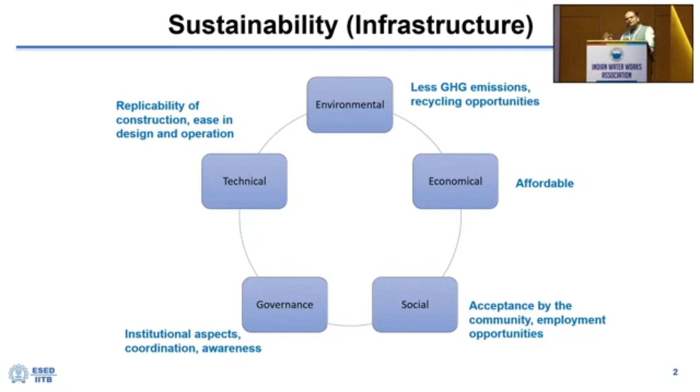Since morning we have been discussing reliable, resilient water supply systems and overall water infrastructure. First you have to understand what is sustainability. Sustainability can be defined by 5 parameters: something environmentally prudent, economically acceptable and affordable, socially acceptable, governance that is easy, and technically replicable by our own engineers and municipalities. These are the 5 parameters every technology or alternative should be evaluated on.

Now, in today's time we talk about resilience, another expectation from engineers to add to sustainability. We have been trying to achieve sustainability, now the era is of resilience. Resilience is a concept from nature - every one of us is resilient. We have shown resilience in COVID times, as a person, as a community, as a city. Similarly, infrastructure resilience is a new concept. Water resilience is the capacity of cities to function in the face of water-related stresses so that those living or working within the city can survive and thrive. Many such catastrophic events are happening, so resilience is very important.

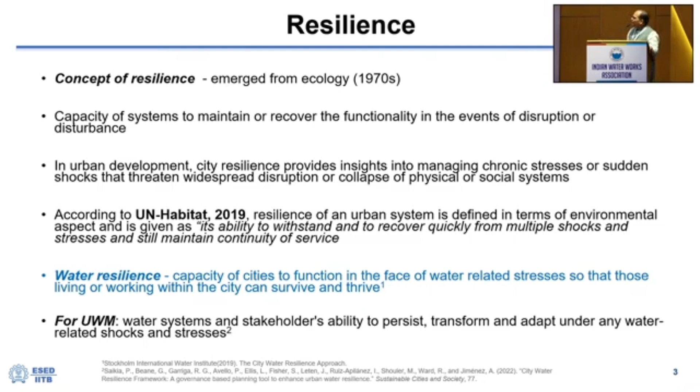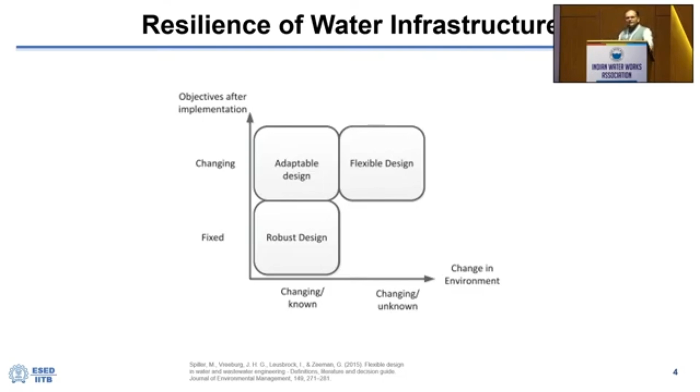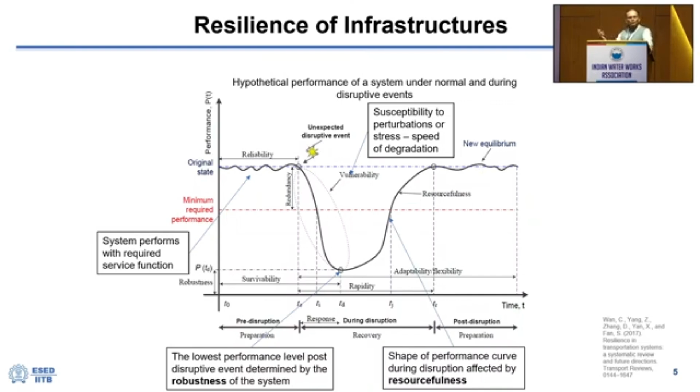Our designs have to be adaptable, flexible, and robust at the same time. All new planning and design guidelines have to consider these 3. On the x-axis you have a timeline, on the y-axis you have performance of infrastructure, measured by supply hours, LPCD, water access, and other parameters. Your reliability may come suddenly down due to flood or drought conditions. As soon as reliability goes down, how quickly you can bring it back up is the resilience, in the simplest term. A lot of knowledge needs to be created about how we can be resilient as a city or rural water infrastructure. So these 3 parameters help assess whether future water systems are adaptable, flexible, and robust.

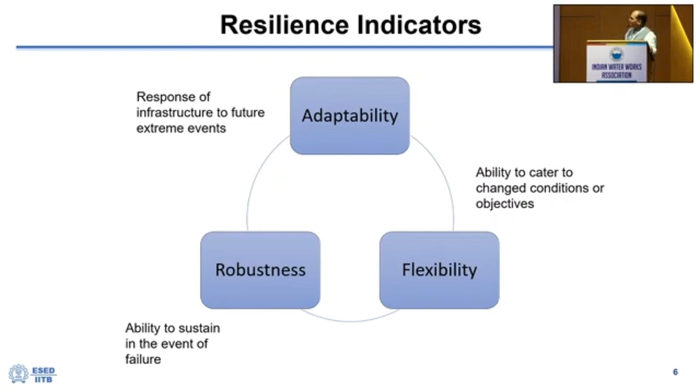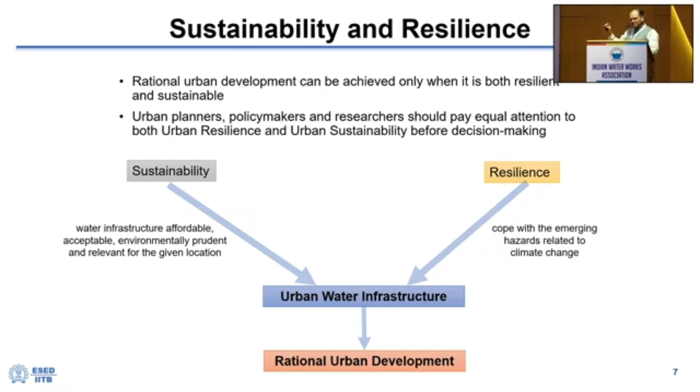So we have 5 sustainability parameters and 3 resiliency parameters to understand if we have to define futuristic water supply systems. Both perspectives are essential - whatever we are doing today has to be sustainable and also has to be resilient. Some of the discussions I'm going to make use these terminologies.

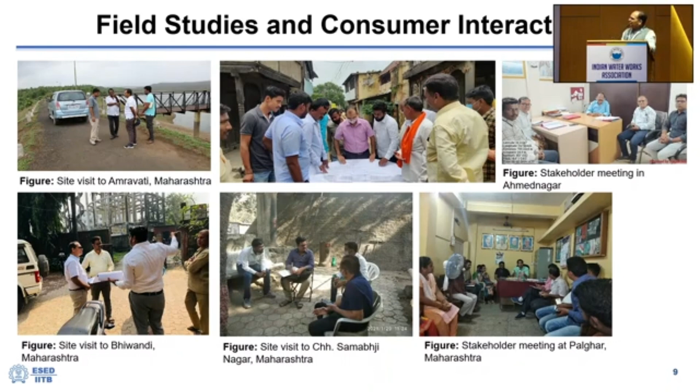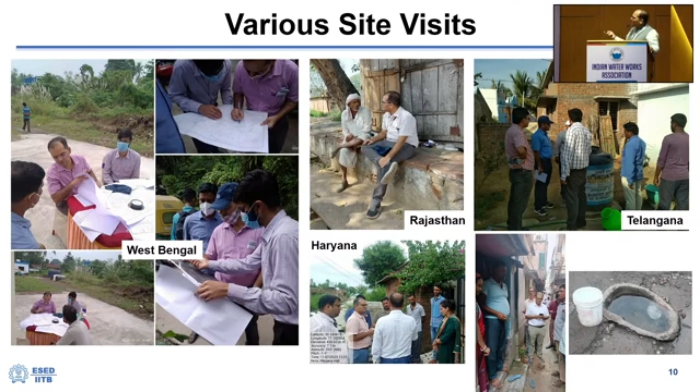Me and my research group study a lot of water supply systems across India. Whatever I'm going to say is based on this fieldwork, not theoretical. I've seen what happens on field in many states. We work with state governments, field surveys and measurements our team does. We understand what is happening on the ground. We do a lot of training programs, international studies, and workshops. We have studied 24/7 projects across Nagpur, Coimbatore - all these projects we have studied. So what I'm going to say is based on all these field observations.

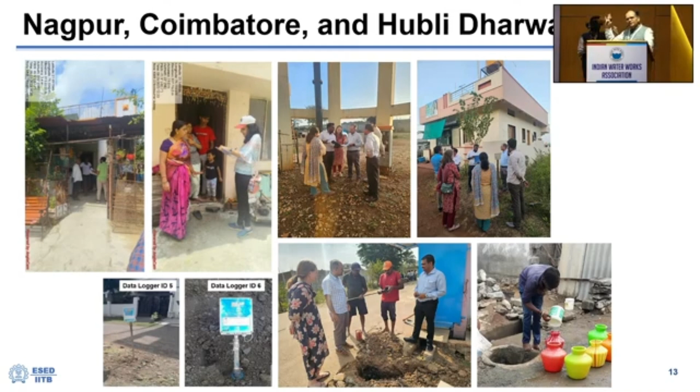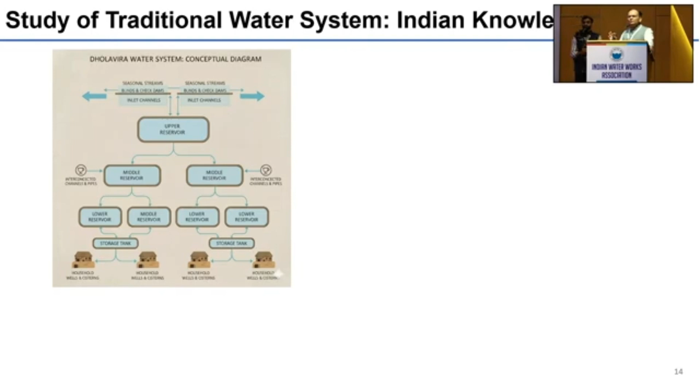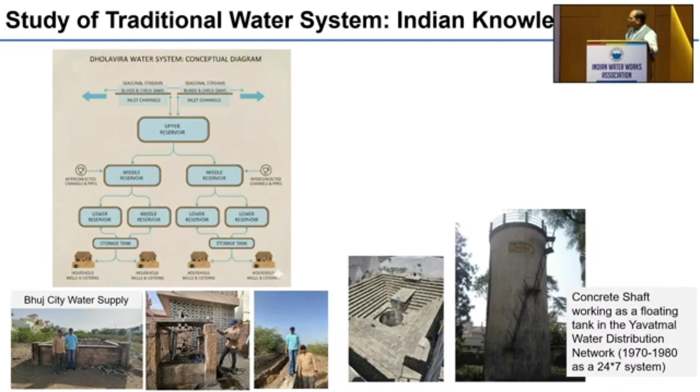A lot of traditional knowledge exists in our country which is basically getting forgotten. Our traditional water supply systems have been resilient. We are a country with tremendous traditional and cultural heritage which we are forgetting - rainwater harvesting structures, very innovative shaft kind of structures done in the 1970s by our own Maharashtra Jeevan Pradhikaran engineers. Many innovative structures exist which are not studied, not brought into today's time. All the knowledge has to be contextual to our conditions. This is knowledge we are missing from our own engineers and people - I think we should focus on that.

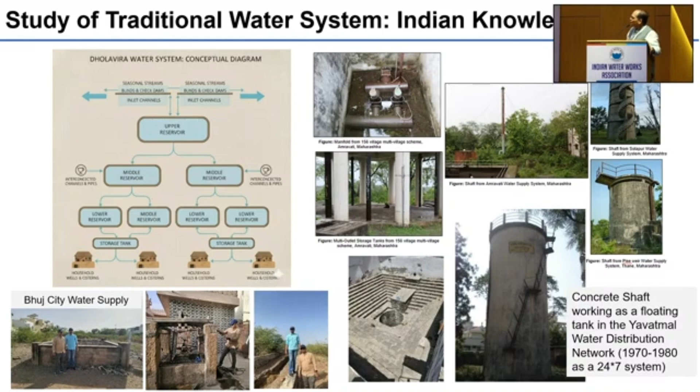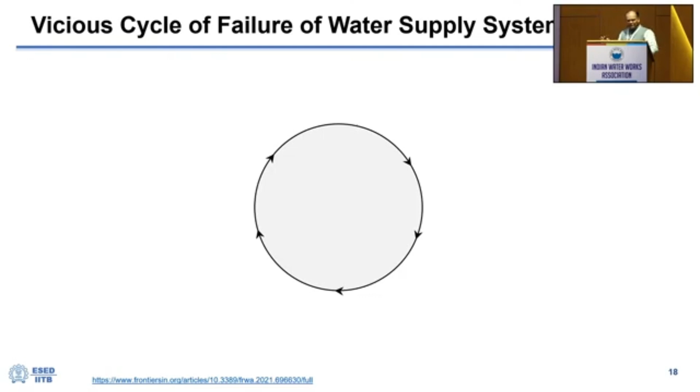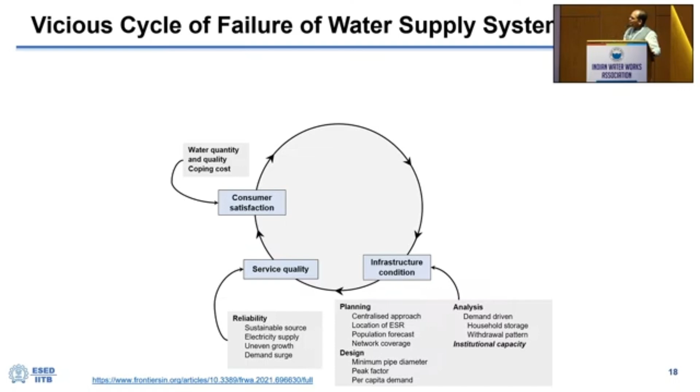So what are the challenges in the water sector? We are stuck in a vicious cycle. Since morning we are discussing what is happening. Infrastructure condition is poor because planning guidelines are not suitable, analysis is not happening as per our local conditions, design is not happening as per our local conditions. That leads to poor service quality, poor consumer satisfaction, poor revenue generation, and poor operation and maintenance.

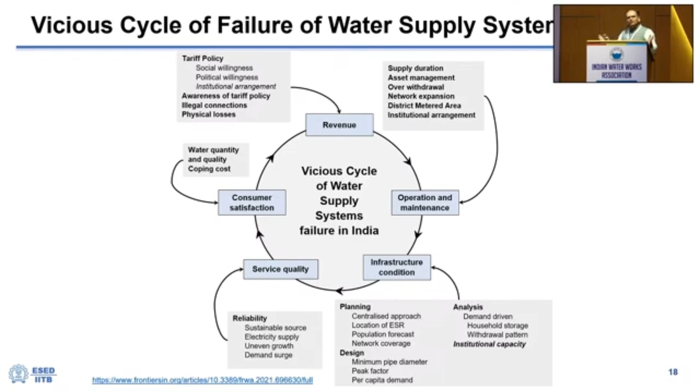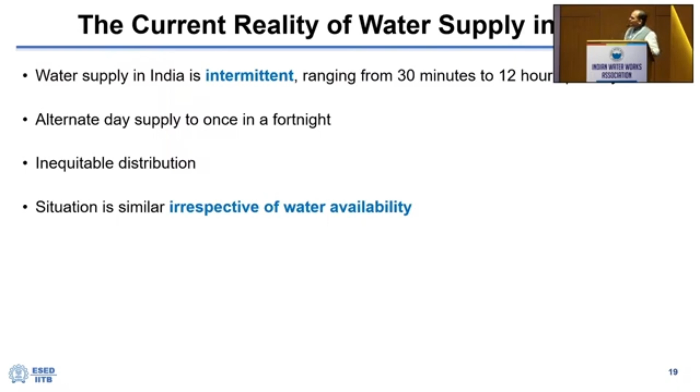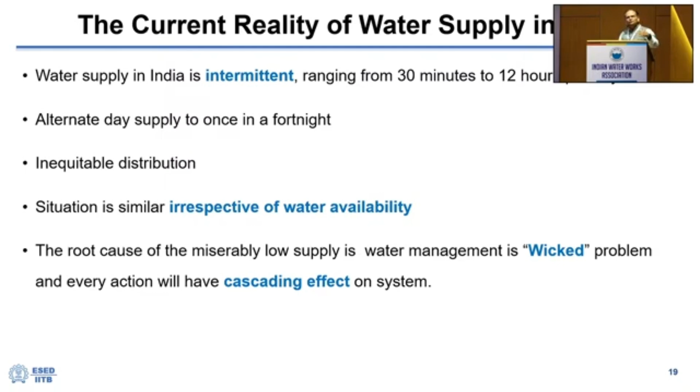Unless we solve this vicious cycle - studied by our PhD student Dr. Anuj Ghorpade, whose PhD dealt with how to break this vicious cycle - our water supply systems will not be futuristic. The current reality is intermittent supply, alternate days in some cities, some once in 7 days, inequitable distribution. The situation is similar irrespective of water availability - whether there is water or no water, we have tremendous challenges. The root cause is that water management is a wicked problem - you try to solve it and it becomes more complicated because solutions are not thought holistically. Like two people fighting and an expert comes and actually increases the fighting instead of solving it - that's what's happening in water management.

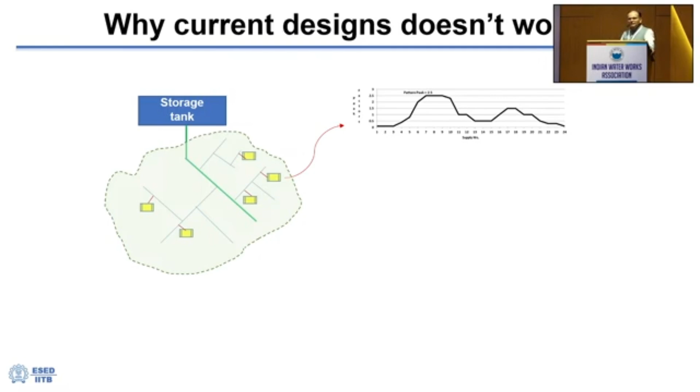So whether the current designs are working, we have to consider, because our entire theory is based on this peak factor theory that comes from our 24/7 design guidelines. But everywhere we are seeing there are storages. Whether you go to a rural area, you will find 2 to 3 days storages. People are using pumps, storing water, and high-rise buildings are also storing water. So our design guidelines don't talk to what the ground reality is.

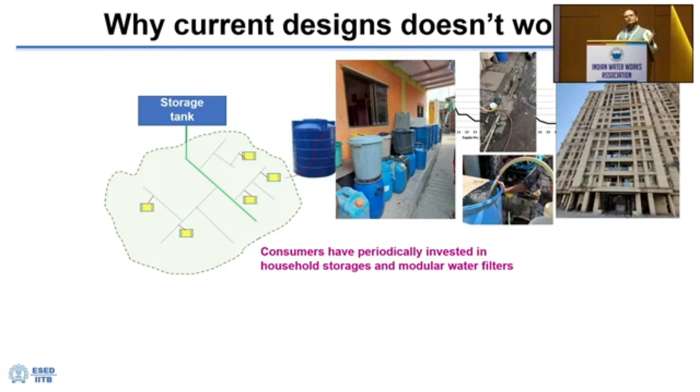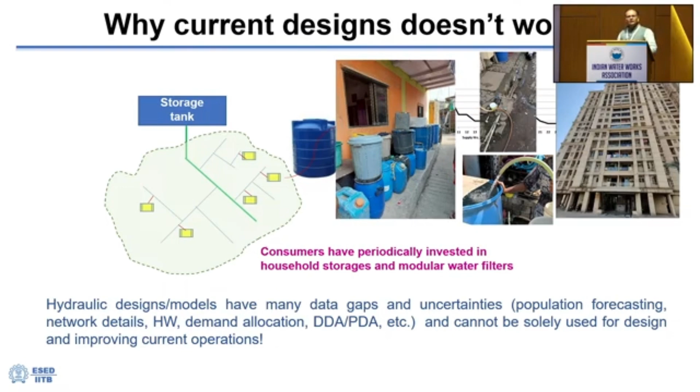So the design remains highly theoretical, and hence expecting that a new DPR, a new project will solve the problem is fictitious. Our hydraulic models have huge data gaps. Our hydraulic modeling techniques themselves are not suited to our local conditions. All the hydraulic models are demand driven, meaning they assume everything is dependent on demands being fulfilled, which is not true. Our models should be withdrawal driven, based on how much consumers can actually withdraw.

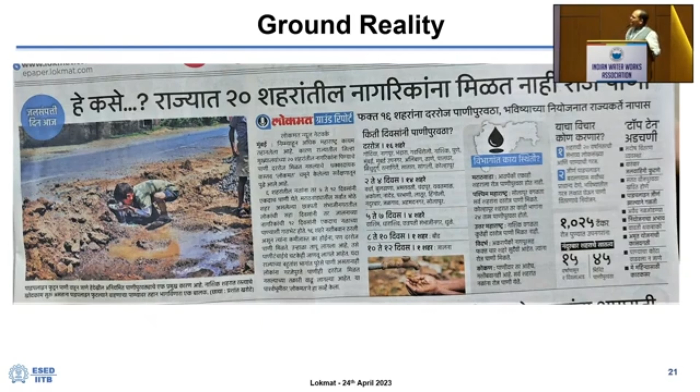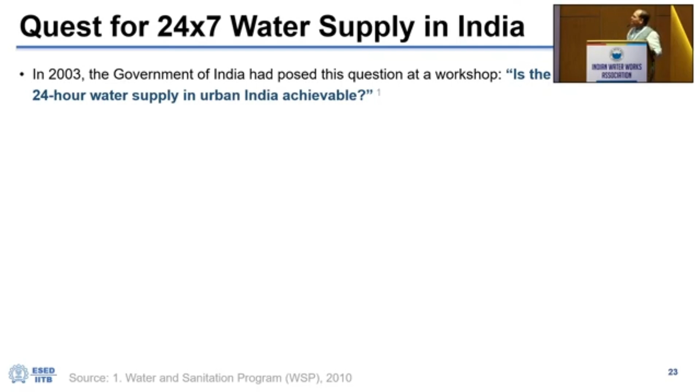So this is the reality, that many cities are not receiving water, and every year we see this news. So forgetting all of this, there is a quest for 24/7 - every forum I go to, people talk about 24/7. This is a long narration, and the program since the 2000s where World Bank funded 24/7 projects started. I have not seen a successful 24/7 project. These are still being planned, still getting implemented. Completions are not there. What is new in the 24/7? Because if the design doesn't change, this is still 1980s thinking.

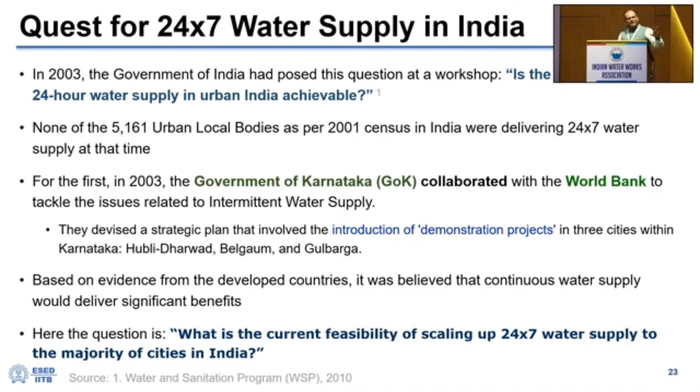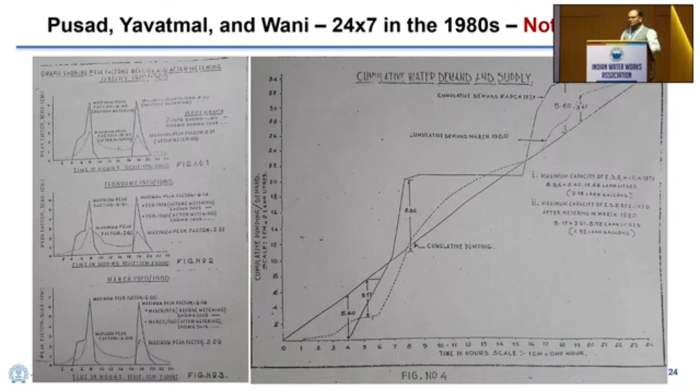Our own engineers have operated Pusad, Yavatmal and Wani in 24/7. So this is done already, available. That knowledge is available with us. We don't need new companies, new kinds of knowledge sets. This 24/7 is hardcore engineering, and that engineering knowledge is available with our municipal engineers, our Maharashtra Jeevan Pradhikaran engineers, with our any government engineers. They just have to be given an opportunity to work with a free hand and take control of the systems. We do not need a very fancy project to do 24/7.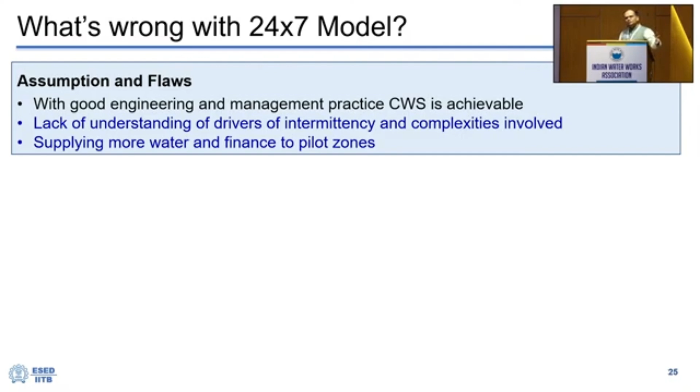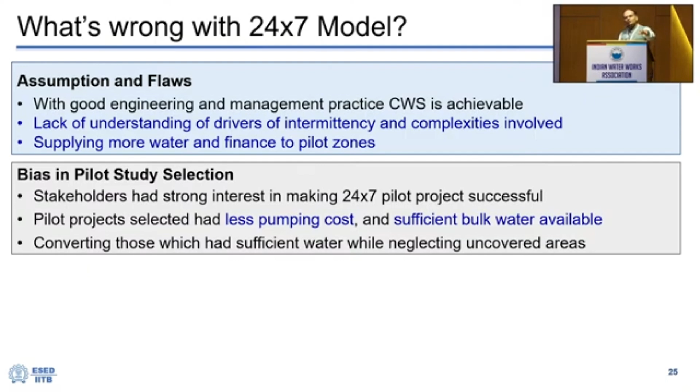So what's wrong with the current 24/7 projects is the assumptions are flawed - that there are very faulty assumptions that you will convert one zone and then do the next zone. As soon as you focus on only one zone, the rest of the zones do not get attention. Pilot selection - I have seen in many 24/7 cases, the pilot is where you supply more water, which is the easiest pilot area. That is the bias in the selection.

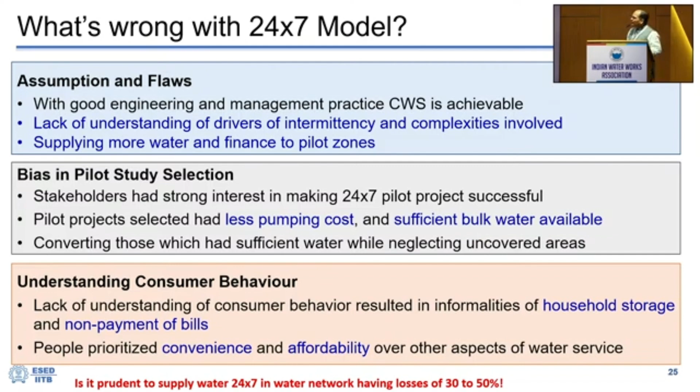And we have to understand the consumers. I have seen in cities where 24/7 is there, but still people are storing water. So consumer behavior, and as Professor Imli has said, water quality is affected based on how consumers receive and store the water. So is it prudent to supply water 24/7 where the network losses are 30 to 50%? Can you imagine that losses are there and still people are going for 24/7? This is my own first-hand experience.

I had done a third-party evaluation and submitted a report where, except for 2 to 3 pilot demo studies in this city, there was no 24/7. NRW is more than 30% across all the zones. Consumer complaints remain the same. Most households continued to rely on ground-level sumps. NRW levels were high, and through all these efforts, the tariffs were increased but service has not increased.

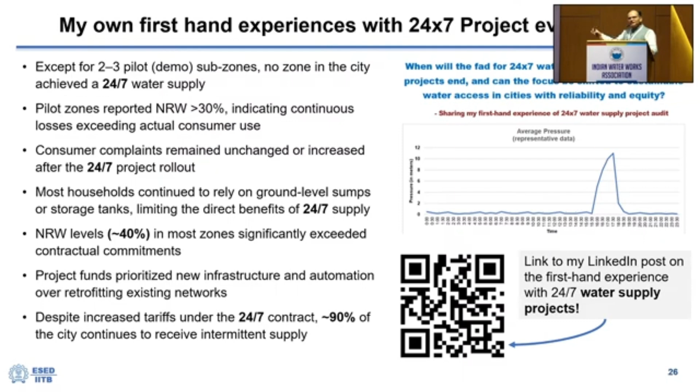So with this kind of situation, do we need this kind of projects? We have to think. So what should be the aim then? I should not talk about problems but the solutions. So the aim should be that unless and until you achieve these 5 benchmarks - that source availability should be more than the total demand and system losses, the cost recovery should be greater than 90%, total losses should be less than 15%, more than 95% of households should be having access, and there is reliability -

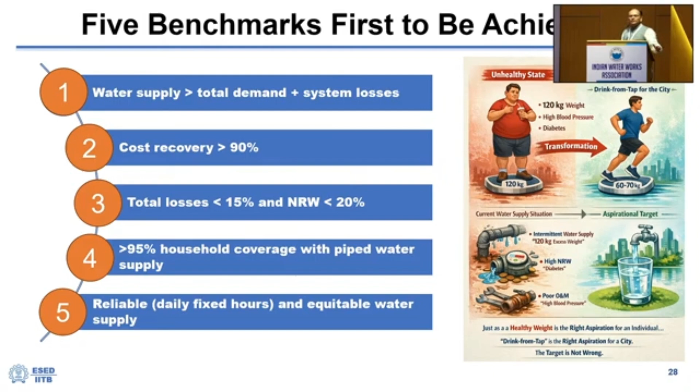if the city has daily water supply, only those cities should be chosen for 24/7 with all other parameters achieved. So you may want to jump from an unhealthy state to the healthy goal, which nobody can deny, but if there is a direct jump, it is going to be an accident. So this is what is happening - a municipality or a commissioner wants advice, and there are people advising them to directly go for a digital solution, AI, and I will be very blunt here: AI and digitization is the final step in the game, not the first step.

We have to work on the basics, we have to fix our basics, only then can we do it. So you may be happy to appoint a consultant who just puts a smart watch on you and declares you a healthy person - that doesn't work. You have to have a person who can work and exercise every day, only then you become healthy. Similarly, for municipalities, you have to do a daily exercise of tackling water losses.

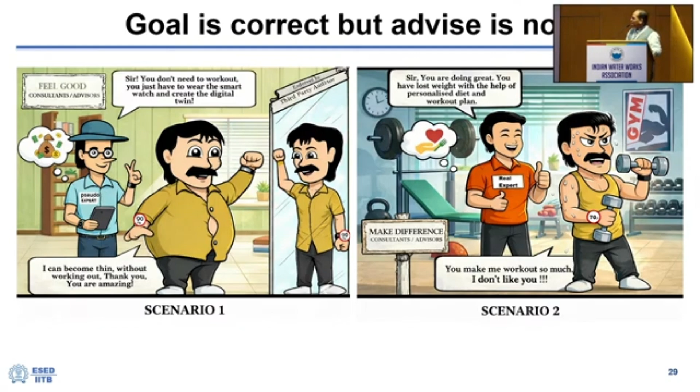So the way ahead is that we have to do a complete circular economy kind of model. We have to improve decentralization, apply indigenous knowledge, local solutions, community involvement, policy governance, and innovation in technology. Whatever technology is available, we have to identify whether it is suitable. If you are going for 24/7, the 5 benchmarks I gave should be followed. If you want to do digitization and some digital twins, the benefits of those have to be ascertained first. Otherwise, all these fancy projects will move attention away from working on basics, and that should not happen, and our cities and water infrastructure will not come out of the miserable condition we are in.